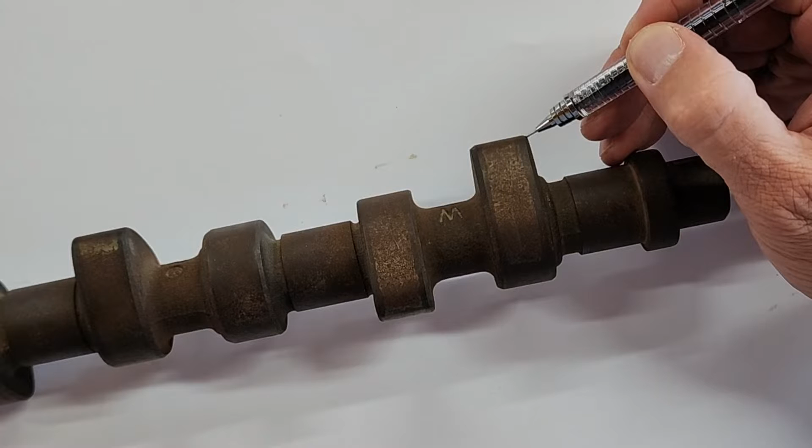'n afkanting. That's the thing that you have to remember. Then if you look carefully, you will see that there is a round edge there on the inside. When it is on the inside like that, it is called a fillet.

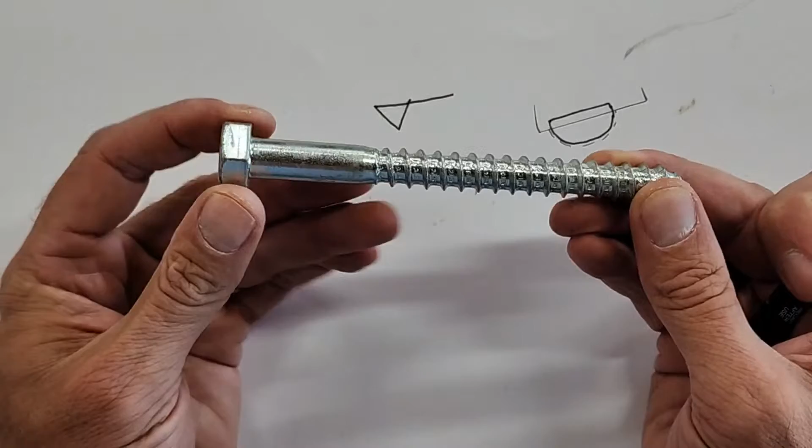Let's look at the next part here, which is our bolt. All right, and so this bolt has different components. We've got our external screw thread here that's clearly visible, and then you have on this end here, on the shaft, an angled end, okay, which is called a taper. So we've got a straight edge here, and then it tapers. So a change in the diameter at an angle is called a taper.

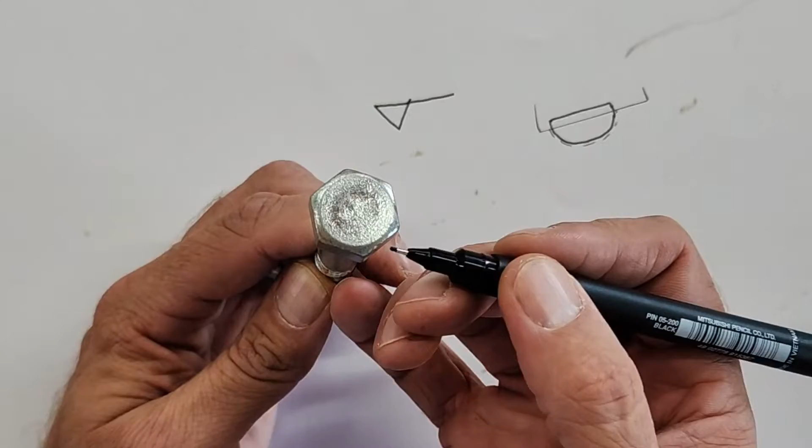Okay. Then on this bolt we've got our head here, and of course we've got the 6 sides of this bolt head. Okay, and there you can see again on top there is an angled surface of 30 degrees. Okay, all right, and then we have our screw thread here, in Afrikaans jou skroefdraad. Okay, let's look at another example.

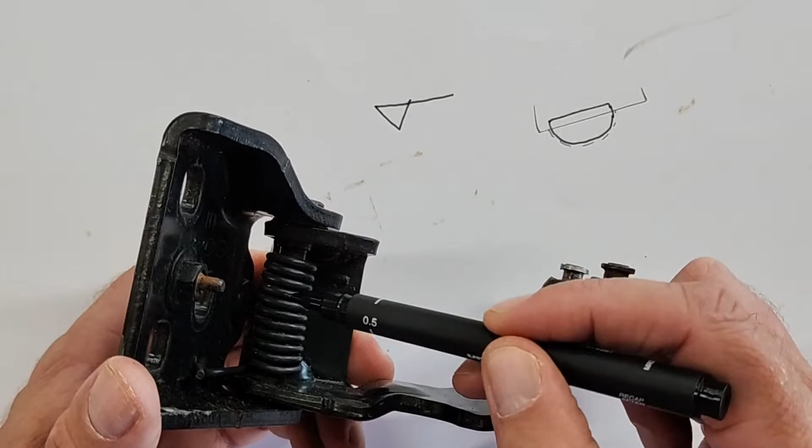Okay, this thing I actually picked up the other day, I cleaned it, and because there's quite a few components, it's nice to know this one. So let's start here from the inside. Okay, here we have a spring. I think you can see that quite clearly. This is called a cylindrical spring, cilindriese veer. And you can see there how it actually allows that to open up. Okay, important to know this, cylindrical spring, cilindriese veer.

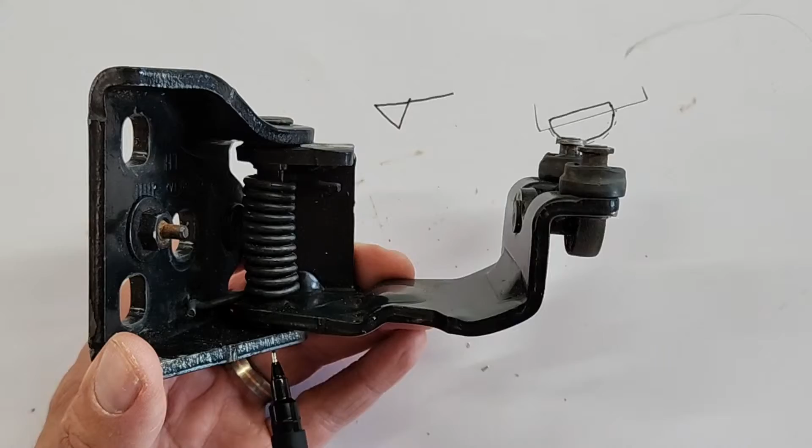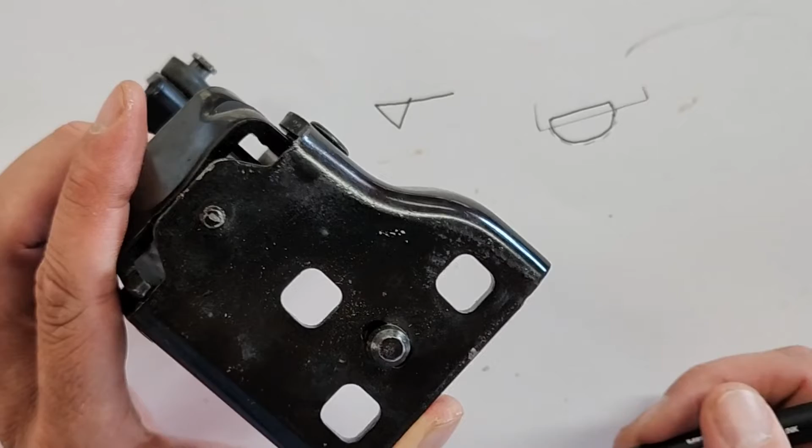All right. Between these two components that join the external one and the main body, there's another shaft there. Do you see, running all the way through? Okay. And it's got a klinknael op die einde, a rivet on the end to join it into place. Okay. Then this might sound simple to you, but you have to know this is a hole. Okay, dis 'n gat. Daar's 3 van hulle.

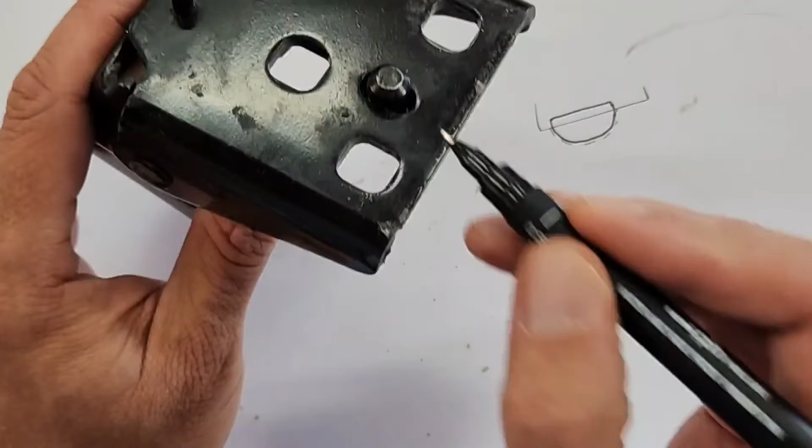All right. Then, let me just quickly double check here. This one here, that extends here, is called a dowel or a tap. Oh, sorry, it's this one here. That's a dowel or a tap. Afrikaans a tap, or a dowel. It's a piece of metal, and this will also, of course, help it to position in whatever it joins to.

Okay. Then on this end here, we've got a couple of things. We know this is a form of a wheel and a guide here, but what allows this to have very little friction when turning? What's on the inside here? Almal weet dit. A bearing, okay? Or a laer in Afrikaans. A bearing, it's called in English, or a laer in Afrikaans. Now you're going to have to know how that bearing is drawn, and I'm going to show that to you in a moment. Okay, well, let's see what else is there.

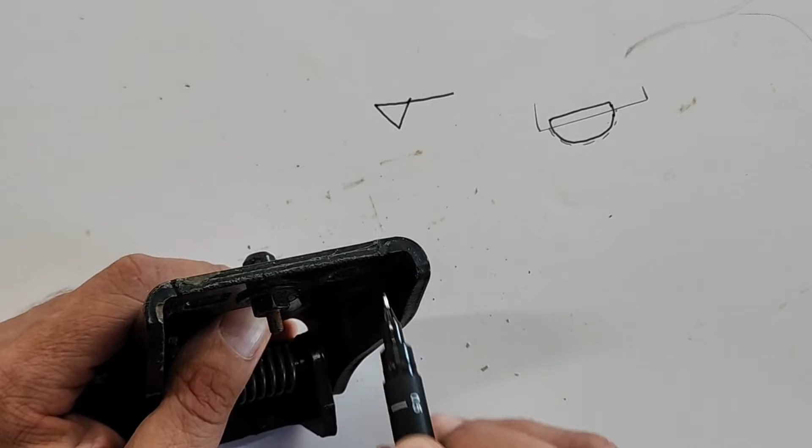Okay, so here maybe is a good, yeah, I think you can see that. So remind me quickly, an internal radius is called a fillet. What would an external radius like this be called when it's on the outside? It's called a round. In Afrikaans, a ronding. Okay, so the moment that radius is inside, it's a fillet. When it's on the outside, it's called a round.

Okay, all right. Then you see here, it's not that clear maybe, but there's a bit of a support here to strengthen this part. Okay, and that is called a rib. Rib in Afrikaans and English, rib. It's strengthening this component so that it can carry a load here. It's called a rib. This is maybe a very small example of it, but I think you're able to see that.

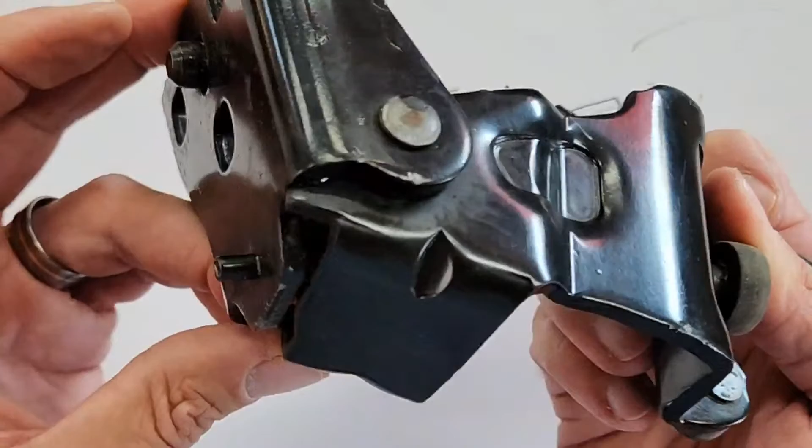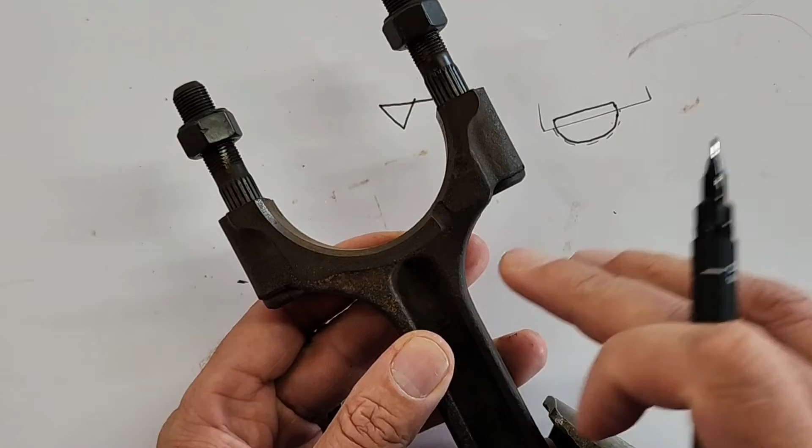Okay, all right, let's look at, I've got a piston here. So we're just running through a couple of components because all of them have got some elements that you need to take note of and that you need to be able to apply. All right, so here at the end of our piston, of course, this is called the piston arm, and you can see again there's parts that are quite rough that weren't machined, but then you have smoother surfaces that have been machined, and it will have that symbol when we actually draw it on the drawing board.

Okay, then we have here a pin, and on that end there is an external screw thread. That helps us to join this shaft or the arm onto, for instance, our crankshaft. So this nut here, I'm just going to take it off for us. That actually has an internal screw thread. Internal screw thread, there's the external screw thread. At the end of this external screw thread, we've got a 45-degree chamfer again.

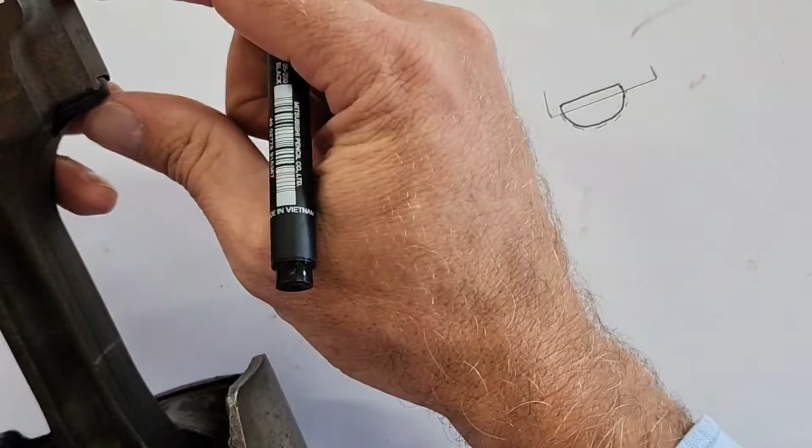All right. Then we have ribs here on this shaft. What would you think is the reason for this? If you just look at how this is joined here, this pin is compressed, or with a lot of pressure pressed through this hole. This is a very strong material. It has to withstand a lot of movement, and so this is actually increasing the fit, the tightness of the fit of this hole as it is pressed in there, to be sure that it's a tight fit. So that's the reason for that. It's increasing the strength of that fit.

All right, here's the top of our piston head, and there you can see also certain parts again machined or not machined. There we have a spring. What is this one? It's got the two holes there. There's actually a spring in there, and if you have the right tool, you will compress these two ends and you'll be able to take out that spring. Sorry, I forgot the name of that.

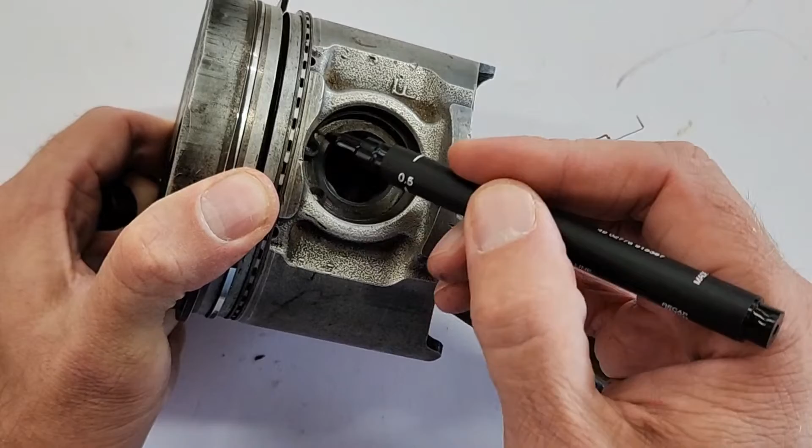There we have a shaft again on the inside. So this spring is keeping our piston head and the arm in place. You see that? It's basically just going to press in, and the moment you release that spring, it closes up this end, and it stays in place. All right, let's see what else I have. We've already spoken about our internal screw threads. That's fine.

Yeah, okay, that's it. Let's have a look at the actual pages on 2.1, because now we're going to put into practice that which we've just learned. They've given you an exploded view of the different components. Now, I'm not going to write each one of these. That's your responsibility, but I will talk you through the next few pages in this video. So if you really want to gain understanding, keep watching and keep paying attention if you're in class, of course.

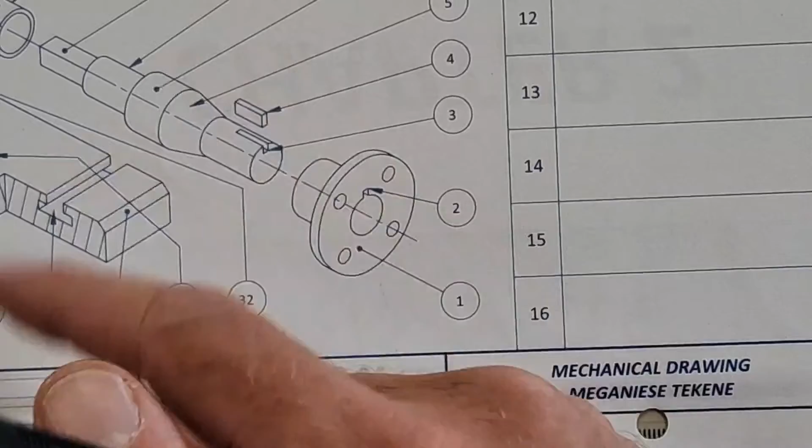All right, so let's zoom in here. Luckily they've given us a good order, so we're going to take our time, and you can identify that which you've just seen with some of these parts. Okay, so let's go up. If you are able to answer them without my help, you can shout it out. When it's got the dot at the end, it's referring to the entire component. When it's an arrow, it's pointing to a specific feature.

Okay, so number one here is called the flange. Flange, F-L-A-N-G-E, and in Afrikaans it is the flens. It's exactly what's going to go onto this end here. If you see there, look at how it's joined. There is a keyway, there's a keyway, and there's the key. Just like I explained to you, okay? So take note of it.

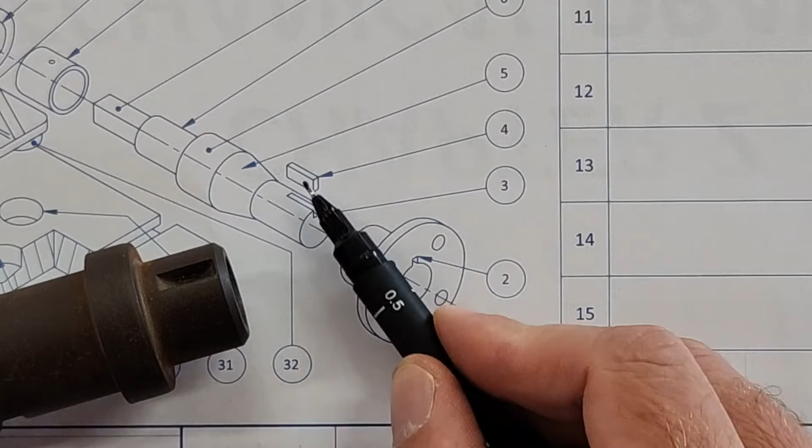Of course, the kind of key is different. The one here is a Woodruff key. This one is just a traditional key, but the way they join together is through a keyway. So that's the next one. Number two, keyway on this flange that fits over that one. Does that make sense to you?

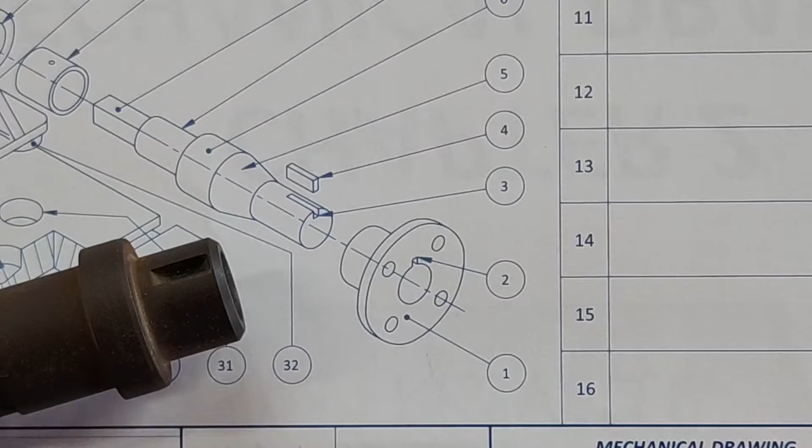Okay, so we've got keyways for 2 and 3, and then key for number 4. Yes? That's right. Alright, let's see how well you listen, because number 5 I also mentioned: if I have a shaft and there's an angled part going from a bigger diameter to a smaller one, it's called a taper. Well done, Mr. Heeman. In Afrikaans, tapsheid. You need to write it in now. There's no answer book for you. You need to follow this.

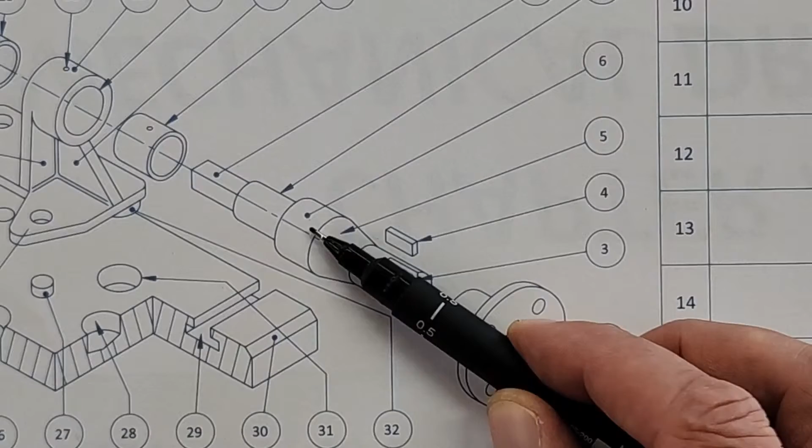Then number 6 here is just referring to this bigger part, which is a shaft. Then number 7, we also spoke about this. On that shaft, there's a shoulder. So it's called a shoulder on a shaft. In Afrikaans, skouer op 'n as. Okay.

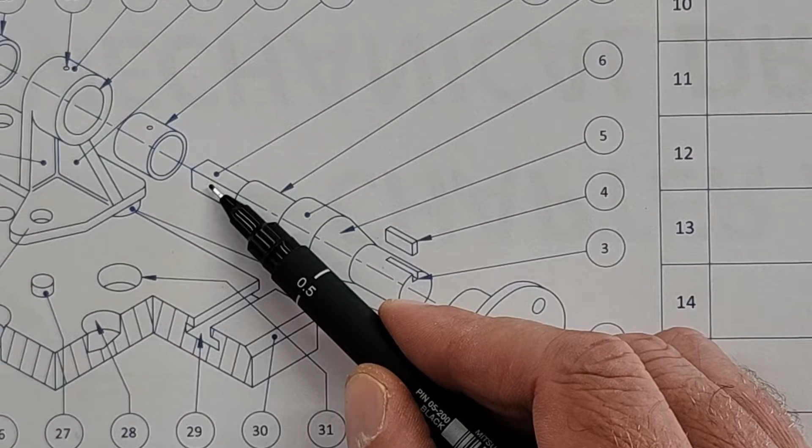This end here, I'm sure everybody should be able to guess in class. What does it look like? Square. Vierkant op as. Square on shaft. So we go from a circular shaft to a square shaft. What would be the reason for that, maybe? Again, to transfer torque, to transfer movement.

If I have a square there, whatever is fitted onto that, if you look here at this actual drawing, you can see that that square fits into that square. Do you see that? And so it will turn number 15, which is our rim. We'll look at that now. Then number 9 here, that is our bush, and that will fit over, in this case, over here at number 7, which is our shoulder. So that is a bush,

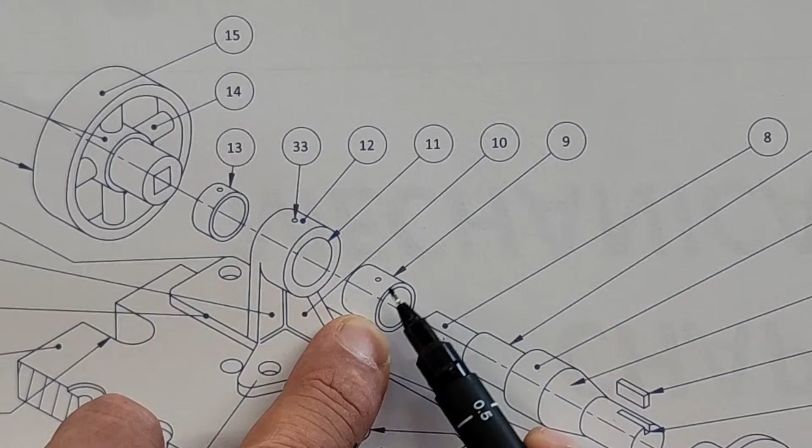Number 10 refers to this part of it, and that is a web. If I would ask you in class, what's the reason for a web?

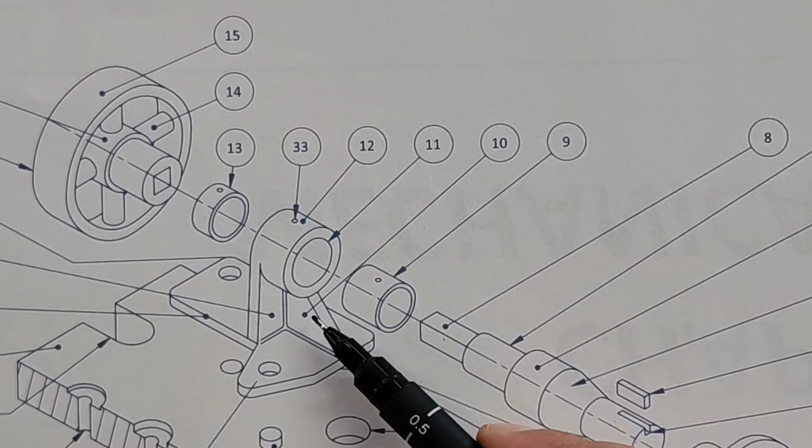It's supporting this structure to be able to withstand movement. No, it's giving support to this top part. Yes.

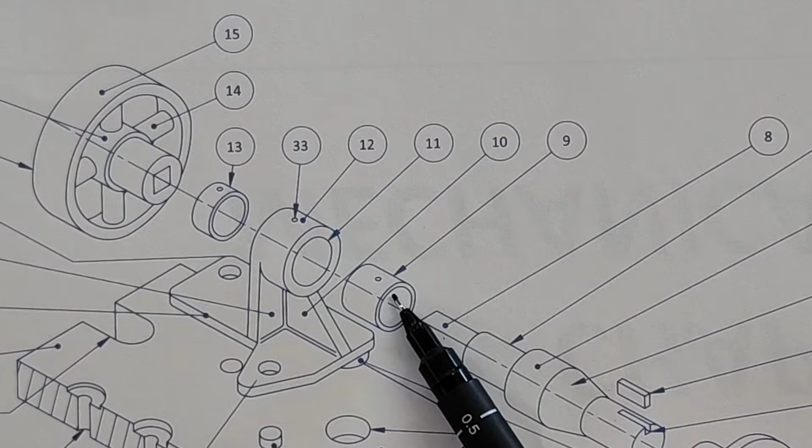Look here people, I honestly can't tell you why they came up with these names. All I know is you need to know these components. So it's time for you to make notes and remember it. Alright, number 13 here is a collar. In Afrikaans, 'n kraagbus. It will be the same diameter here as our bush. Kraagbus. Alright, and then you're going to number 14, which is part of this rim.

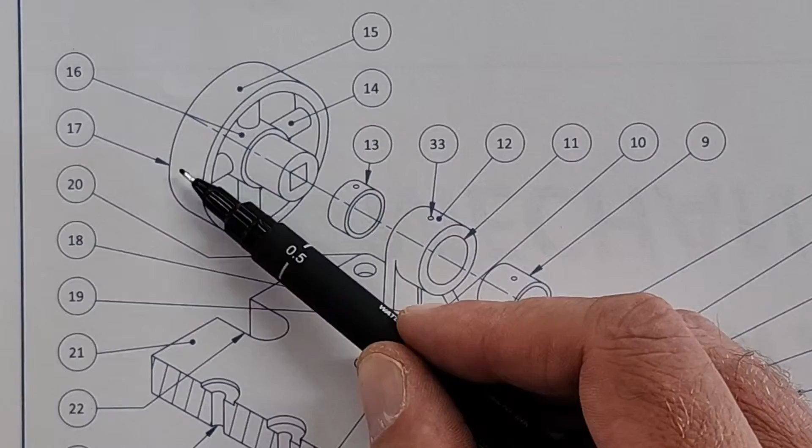In English, it's called the hub. This part here. Then number 17, this component in total is called something that's very common to you, a pulley. Or in Afrikaans, 'n katrol. Katrol, pulley. Okay, then we continue. Let's jump to number 18. You know what that is already. It is a rib or a web.

Well done. Number 19, this base here, that is called the bracket base. In Afrikaans, die steunstuk. If you see here, number 25, which is our lug, fits over 27, which is the dowel or the tap. And so each component here will fit and have it placed exactly where it needs to be. But it's called our bracket. In Afrikaans, die steunstuk. Alright, number 20, there we go.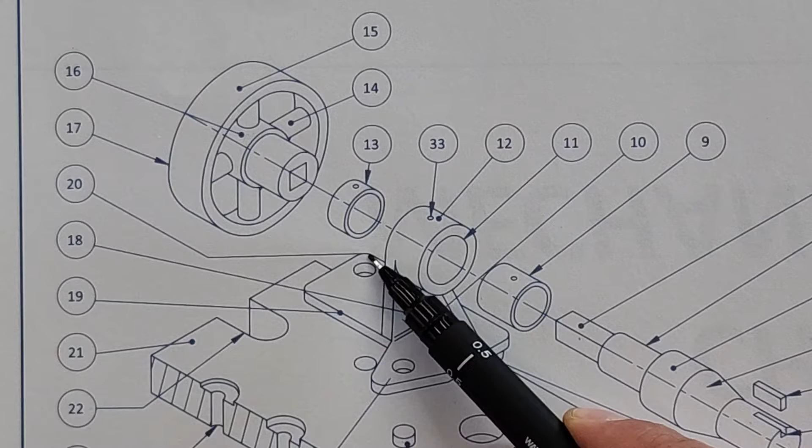So that is our round. Let me see here. They say it's a fillet. Can that be? Where's the internal one?

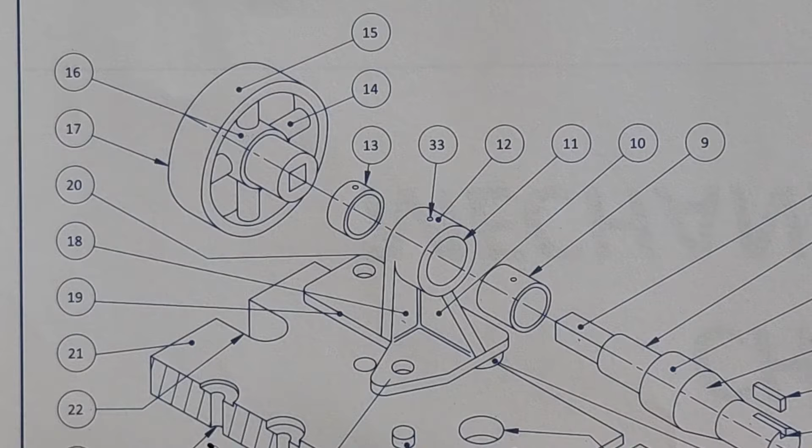Number 20, the fillet. Okay, I'll just double check that one. Number 19 here, sorry, I'm over 21. This is there, it's a table on which this fits. In Afrikaans, die blad. Number 22 is 'n slot of 'n groef. Number 20 is 'n ronding of 'n fillet. Okay. Then number 22 we've said is a slot or in Afrikaans 'n groef. Slot, S-L-O-T. Alright, number 23.

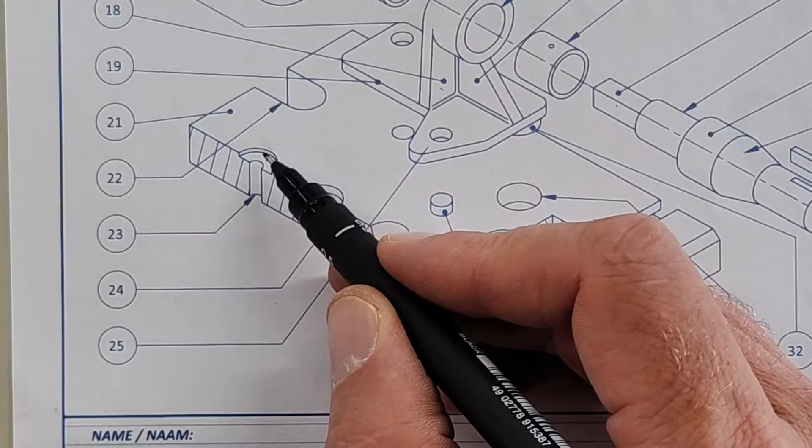Alright, this hole, if it has a flatter part that's wider than the hole itself, it's called a spot face hole. Spot face hole. In Afrikaans, koolvlak gat. Koolvlak gat. In English, spot faced hole. When it's got that flat part, then it's spot faced, koolvlak. Number 24, that is a counterbore, parallel versinkte gat.

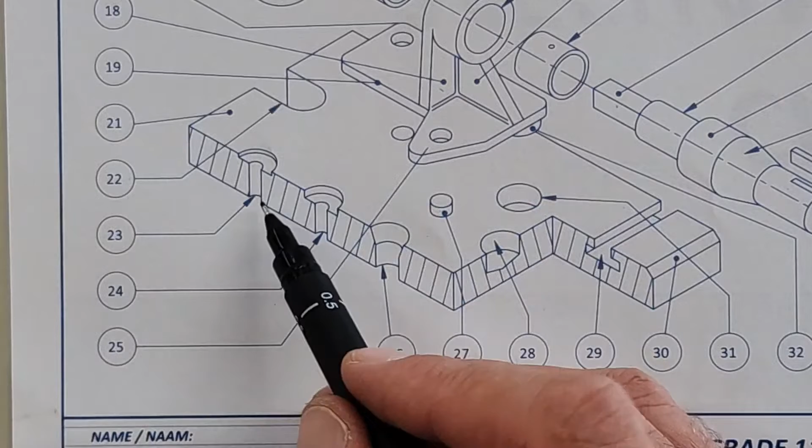Okay, so I think it's difficult to see the difference between these two, counterbore and a parallel versinkte gat. The one is deeper than the other one. But when they just give you one, it will be difficult to identify. So just for yourselves, if it's very shallow, you refer to it as a spot-faced hole. If it's a bit deeper, refer to it as a counterbore hole. In Afrikaans, parallel versinkte gat. Eerste een was 'n koolvlak gat. Okay, just double check those two.

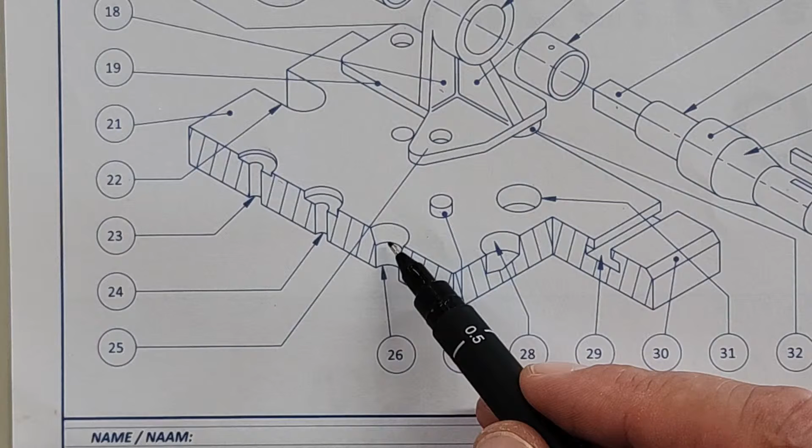They're very much similar. Alright, when it's at an angle here, that's easier. That's a countersunk hole. Countersunk. Afrikaans is dit 'n versinkte gat. Versinkte gat. Okay. Nummer 27 het ek gewys vir julle. Dit is 'n tap. In English that's called a dowel. Tap or a dowel. Alright.

Then this hole here at number 28. So what is interesting about this hole, it does not go all the way through. So it's blind. Looking through that, you can't see all the way through. So it is blind. Blinde gat. Blind hole. Easy to remember that one. It doesn't go all the way through, so you can't see through it. It's a blind hole. Blinde gat, yes.

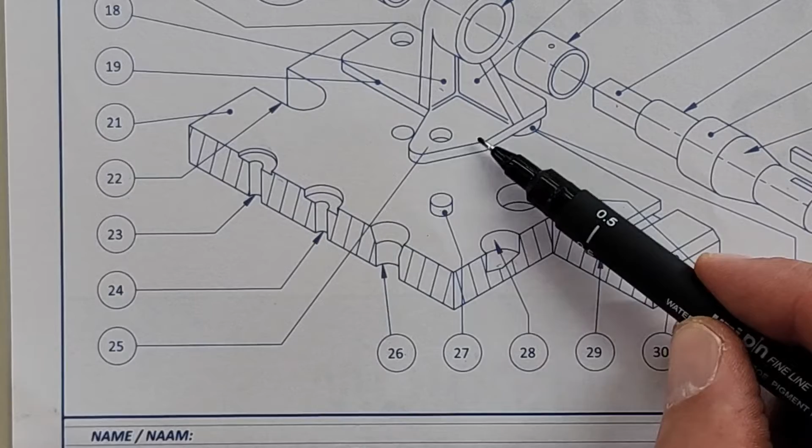Number 26, countersunk. Well done. Yeah, 26 is the countersunk. Number 27 is the dowel. Number 28 is the blind hole. Afrikaans, 26 is die versinkte gat. 27 is die tap. En 28 is die blinde gat. Okay, 25. I missed it. Oh, okay. That is a lug, hingsel. It's this part here that comes out here. Lug, hingsel. Don't ask me why.

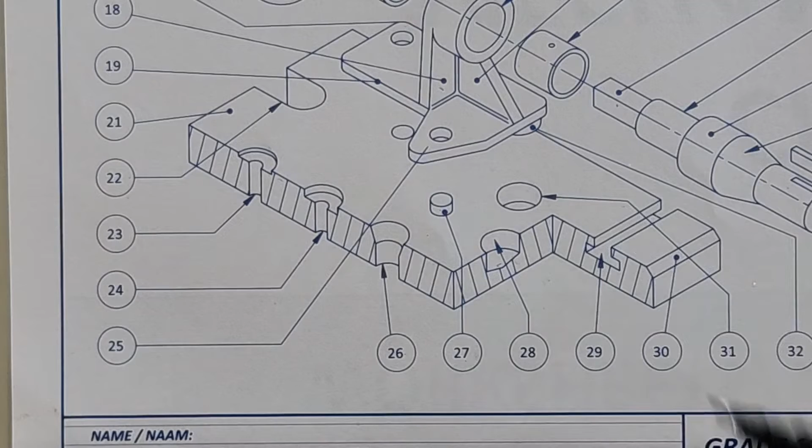Alright, let's check here number 29. Alright, so this is an easy one. You can see there it's got that shape of a T. So it's a T-groove. T-groove. Number 30, that's that 45-degree chamfer, afkanting, 45 grade afkanting wat jy al gesien het. Nommer 31 is tapversinking, recess.

Look, honestly, it's so difficult to see the difference between many of these things. So when they ask this in the exam, it will be much clearer, né? When you get this as a test. But just for now, make sure you know the correct name. It's called a recess, tapversinking. Very much similar to this part here, né? But there's no hole going through. So it's just this part here that they want to fit in there. So it's also very close to a blind hole.

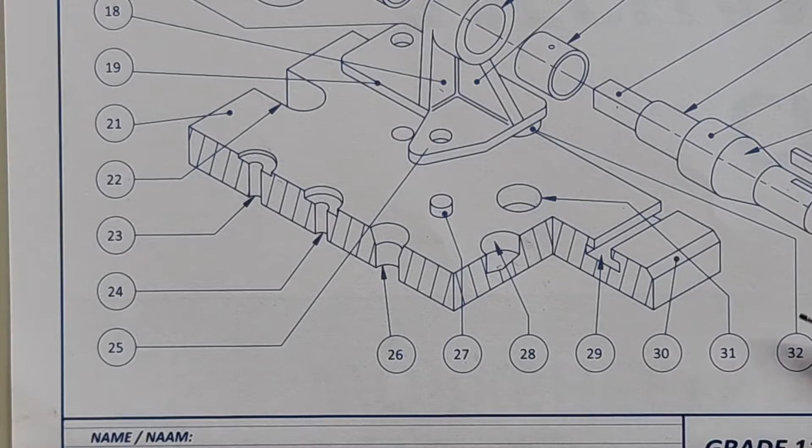Alright, then at 32, that is the spigot. Spigot, it fits into this recess. In Afrikaans is dit 'n tapspen wat in hierdie tapsversinking ingaan. Tapspen en tapsversinking, so die twee gaan saam. Ek dink hulle sal dit so vir jou wys ook in die eksamen. So make sure you write it down. This is called the spigot and that is the recess. In Afrikaans is dit die tapsversinking en daai is die tapspen.

And then the last thing for you to take note of is 33. It's right here on top and that is your oil hole. Oliegat. Oil hole, oliegat. Okay. Alright, let's see if we can do 2.2 as well.

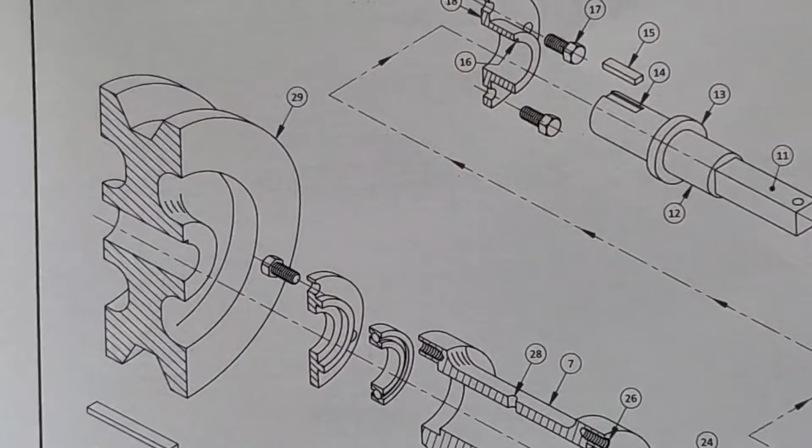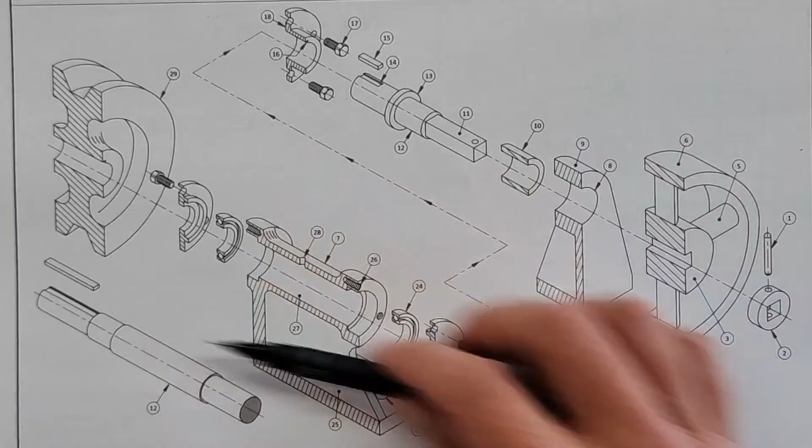Okay, we're going to start, maybe I can zoom it out a bit so you just see the bigger picture here. Okay, so there is a beautiful drawing given by the guys from HSE. Exploded view of a mechanical assembly. Plus, in this case, they've also sectioned it so that we can see the inner workings of it. And there's a few more components that we're quickly going to look at, but some of them you already are familiar with. Let's zoom in so that you can follow with me closely. We're just going to go again from 1.

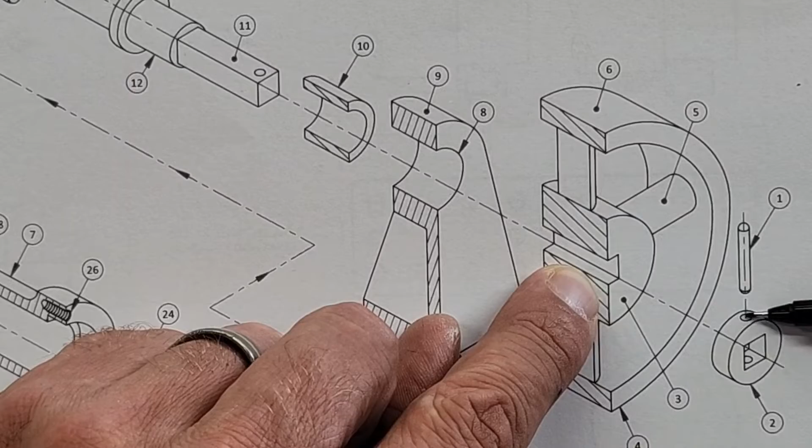So, number 1 is the pin. Pen. Afrikaans pen, English, it's called a pin. Right. Number 2 is a ring. Now you can see here, if you look at this drawing, that this shaft has got a square on the shaft. It goes through the bush and all the way through our flywheel, it goes through this square. Do you see what happens? This pin falls through this hole, through that hole there. Alright? And it's going to fasten our shaft onto this hole. Does that make sense for you?

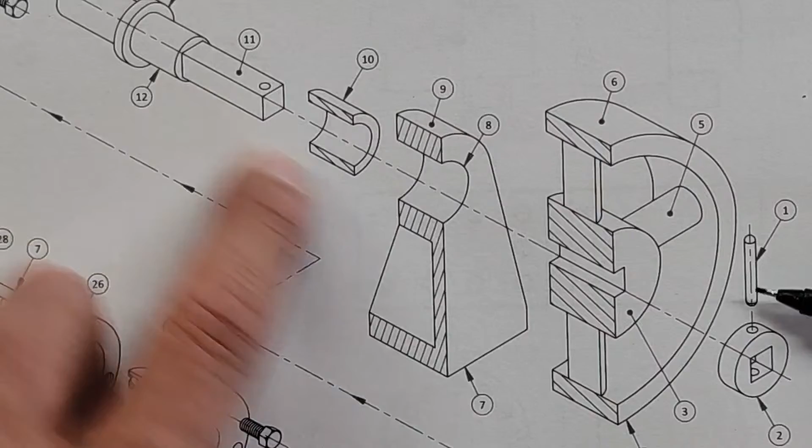So everything that you're going to see in mechanical assembly is going to have these kind of features and, of course, reasons for being there. Okay, so the pin ties in this shaft through this ring onto the flywheel. All right. Number 3 here is our hub.

Ring. Okay, number 3 is your naaf, and we've done it just in the previous drawing, so you should be starting to get this. Hub. Okay. What's number 5? Help me out. Oh, number 4. Let's do number 4. 4 is there. It's the wheel. It could also be the rim, nee?

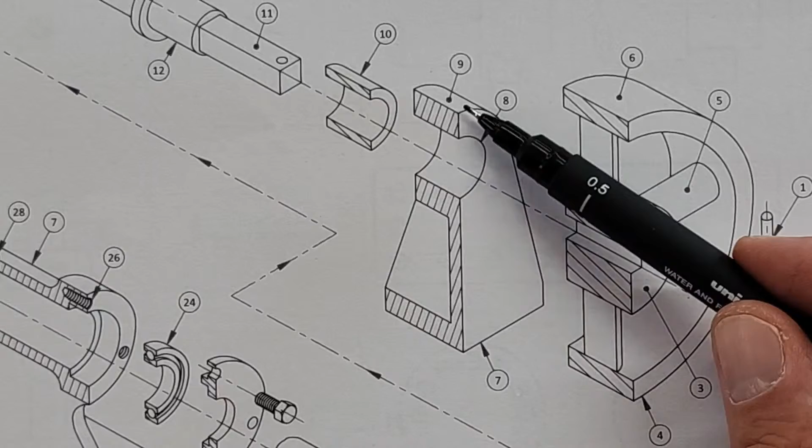Nommer 9 verwys na die hele saak wat die naafbuskop is. In English, this entire part is called the boss. Boss. Like you go boss, man. I'm the boss. Ja.

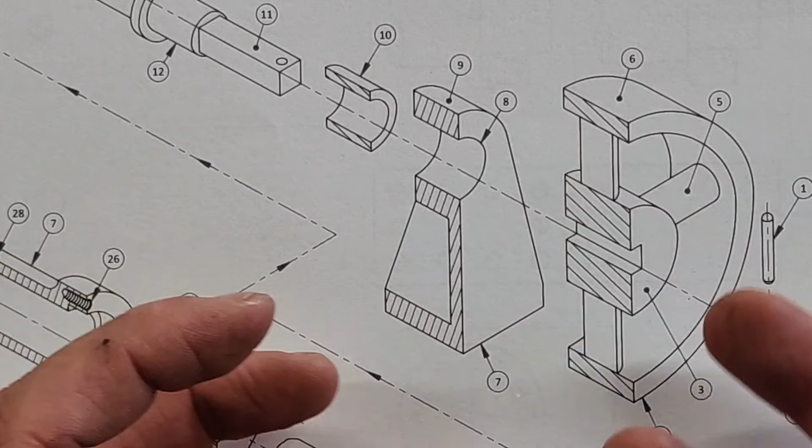Okay? The body. Alright, let's look at number 10. Number 10 is your bush. It's not a complete bush that they've shown you here. Then we've got number 11. You know that? What is it? Square on a shaft. Vierkant op 'n as. Number 12 is going to be this shaft in total. And number 13. Yes. On the shaft we have a what? Shoulder, skouer op 'n as, shoulder on a shaft.

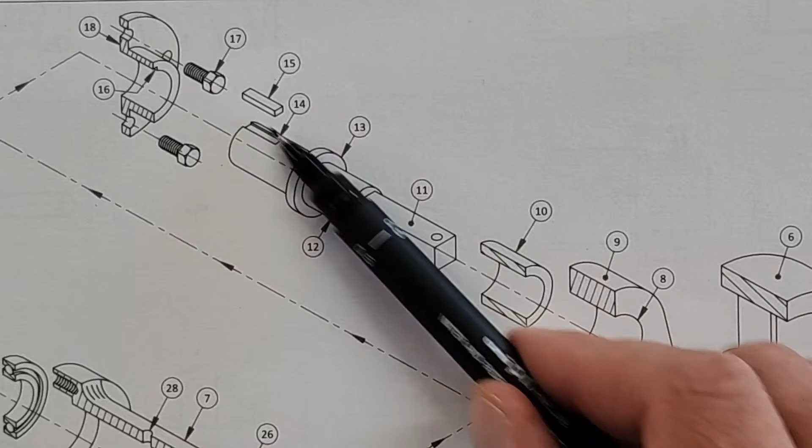Alright, number 14, you know that, what is it? Keyway, spygleuf, mooi. Then 15 is the key, well done, spy. Then at 16 there, it's very small, but that's the keyway on our flange, of ons flens het daar 'n klein spygleuf. Number 17 is a bolt, en dan 18 is die flens, or the flange.

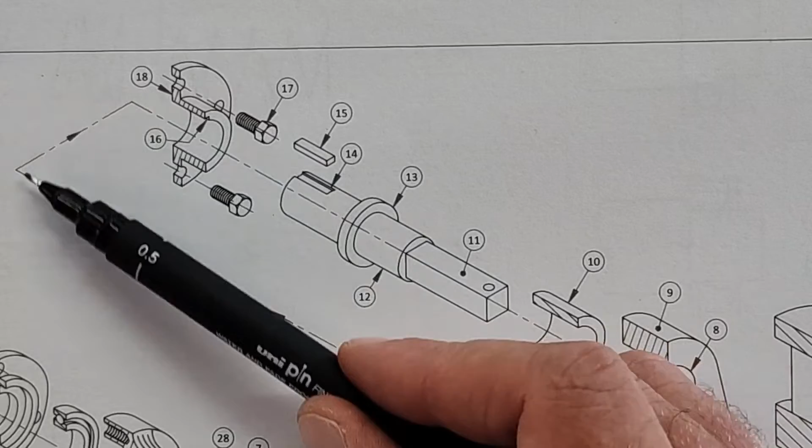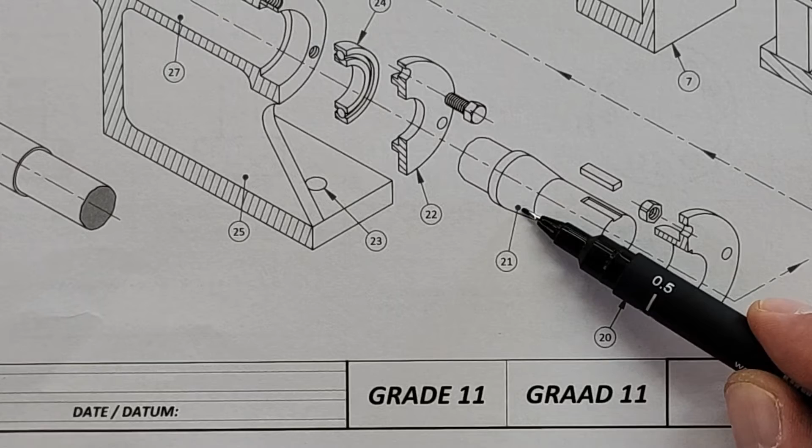Okay, keeping up. All of this is put together, so we go back all the way to the bottom. Now with number 19, we again have a flange, so we've got 2 flanges that are going to be bolted together with that bolt we just looked at, and the nut. So that nut puts the 2 flanges together via a bolt. Again, they didn't ask it, but there you can see how the key and the keyway fit together. What is number 21? Taper, good.

Then we go to 22, which is a cover plate. It covers our bearing. Why would you have a cover plate that covers a bearing? Yes, dust, to keep it clean. Number 23 is a hole. Ek het jou gesê jy moet kan weet dis 'n gat. Number 24, we've got our bearing, ons laer. 25, you know, it's a rib.

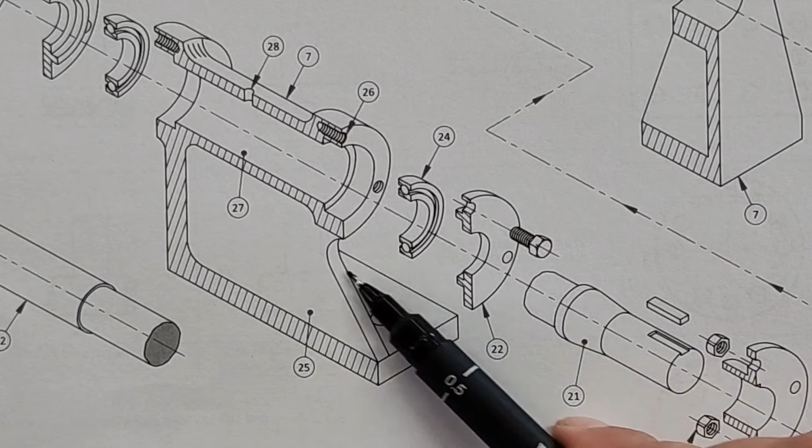What's interesting, look at this. Do I section a rib? Gaan ek 'n rib arseer as ek hom sny? No, not when I cut through the length of it. That's why you see here very clearly it's not sectioned. It would have been very confusing if we had section lines all the way through. So a rib is never sectioned. Number 26 I missed.

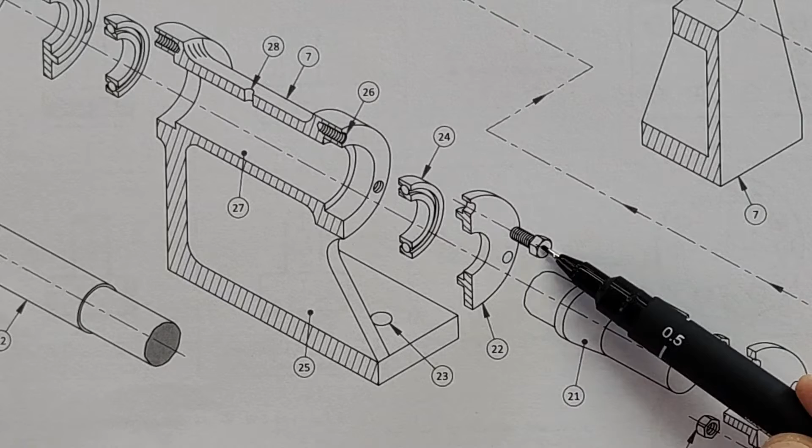Tapped hole, getapte gat. So that is a screw thread on the inside there. They will use this bolt to tie the cover plate on. Number 26 is a tapped hole. Afrikaans getapte gat. Okay, then 27 here is an oil cavity. Alright, that's the oil.

There's the oil hole, oliegat. I think they're numbering there, oil hole, oliegat. They say 27 is an oil cavity. So if I put oil into that, it will, of course, fill this cavity here. Okay, oliehouer. Oliehouer or oliegat. And that oil will ensure that there's not friction on the shaft when it moves.

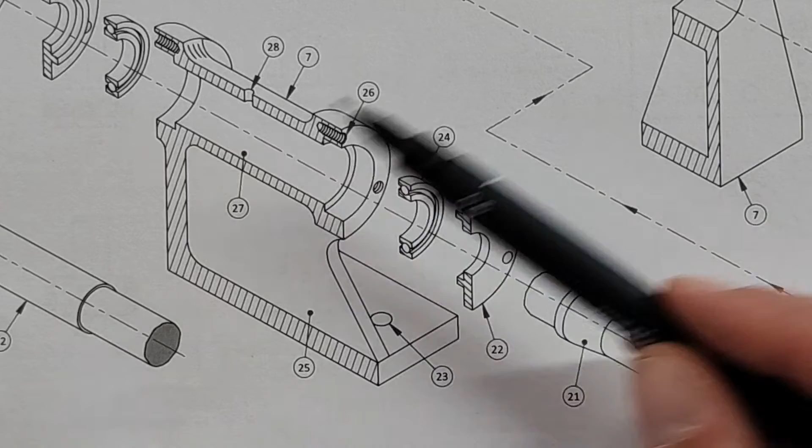Okay. Alright, then the last two: 29 is a V-belt pulley, a V-band katrol. V-belt pulley, I think a lot of you have seen that before. There's one more on here, that was number 12 that I missed, and that's just the shaft, the as here.

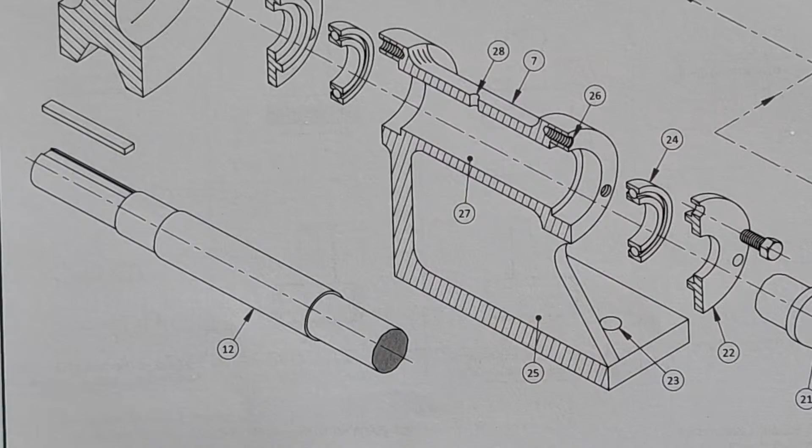So, alright, there's one more page. If you are wanting to stay with me, we're going to do one more page, and that is page 2.3, and then we will be done with the preparations for our actual mechanical analysis. So let me just organize myself here for a moment.

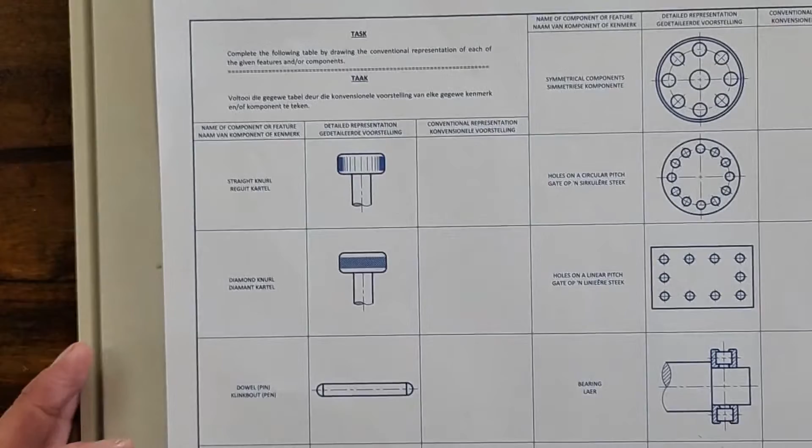Okay, so these are again different components. This is most likely how they will ask it for you come the exam. Alright, they'll actually show for you the detailed representation, and you have to draw, then give it a label. Okay, now I'm going to have to help you with this one because they want us to draw freehand the different components. So we're going to see how far we get here.

Alright, so there's a detailed way of representing a straight knurl, and there is a conventional representation. A straight knurl is at the end of a shaft that I want to be able to make adjustments. Why would they put knurling on there? Why? For grip. Your water bottle has knurling on it, straight knurling on it, when you open that up.

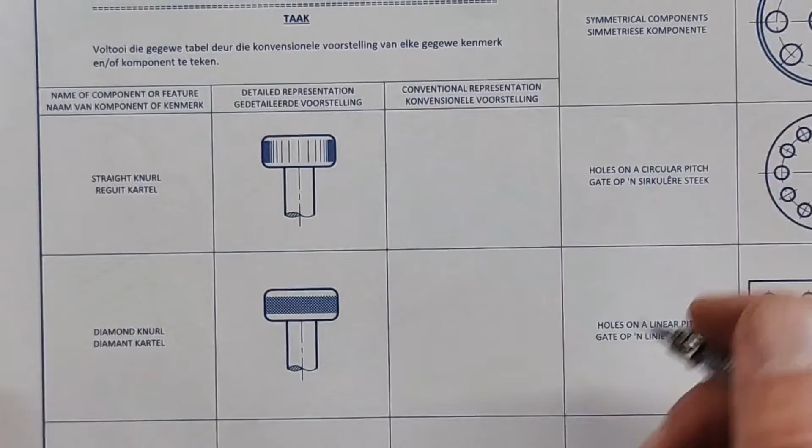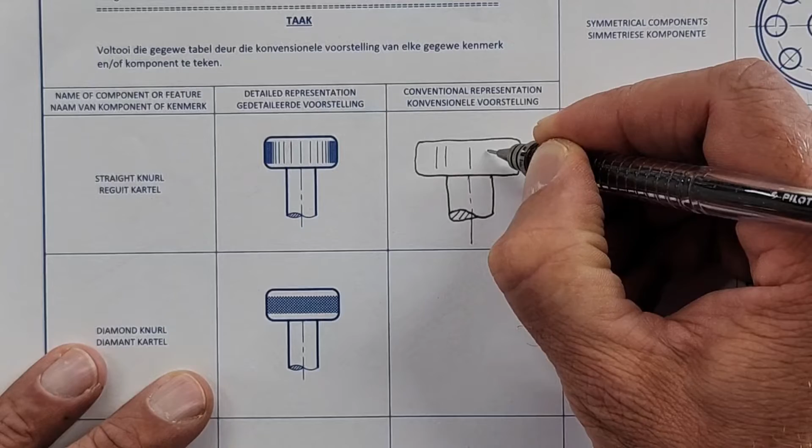Okay, so the way that you will draw it, you can stay with me here, try and keep it neat, okay? Yeah, so just as we draw, I'm going to teach you some things. This is called an S-break here on the end. You have to have your center line also here, alright? And then that knurling is just lines, not equally spaced, on the outside a bit closer on the inside, so that it kind of gives you that idea. Okay, that is straight knurling. We're going to go quick because we don't have much time.

Diamond knurling, it's similar. Your radio at home has got diamond knurling on its knobs, but they use it, of course, in mechanical also. So we've got our S-break here on the end that needs to be hatched. This is all center line, and then we're just going to do freehand diamonds. Okay, that's the conventional representation. This is how we will most of the time draw it.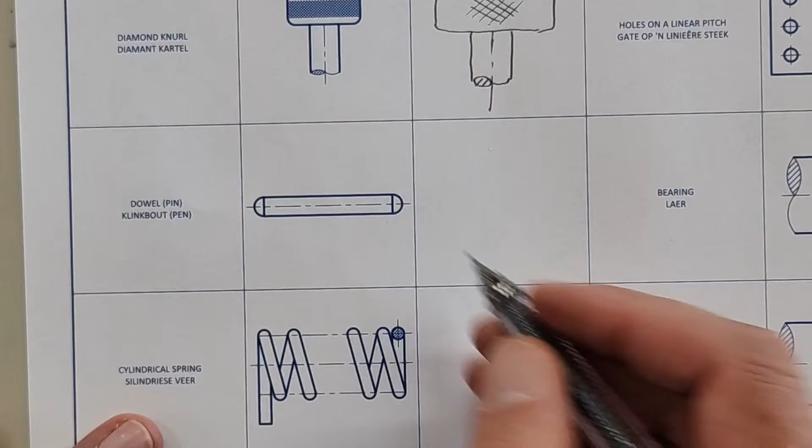Then a dowel or a pin, they just want us to be able to draw the end of that. So put a plus in there, color the different parts, and then the last thing here is we need to have our center lines. Okay, that's the end of a pin. So we're going to go quick.

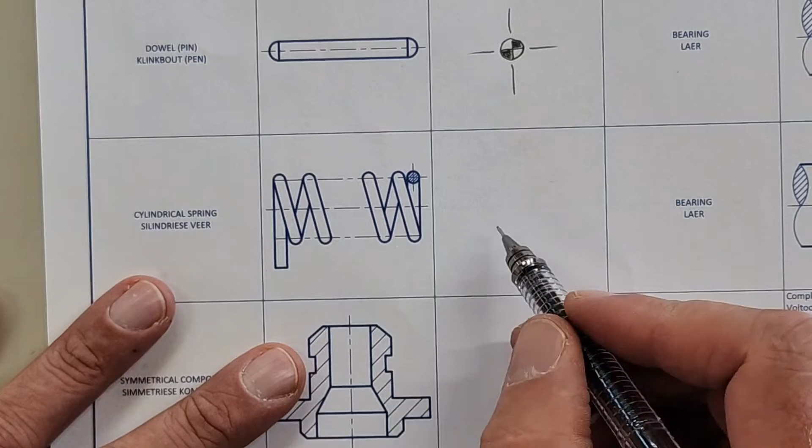Remember we did a cylindrical spring, and this is how we draw it. So we're always going to have the center line, and then we have the start straight line, and then we're going to go zip, zip, zip, and you can do as many as you want here, but you have to end with a line that is straight. Okay, makes sense? Can have a few more springs in there if you want to. They didn't specify the amount. Maybe try and get it a bit more even than that, but that is the conventional interpretation of a cylindrical spring.

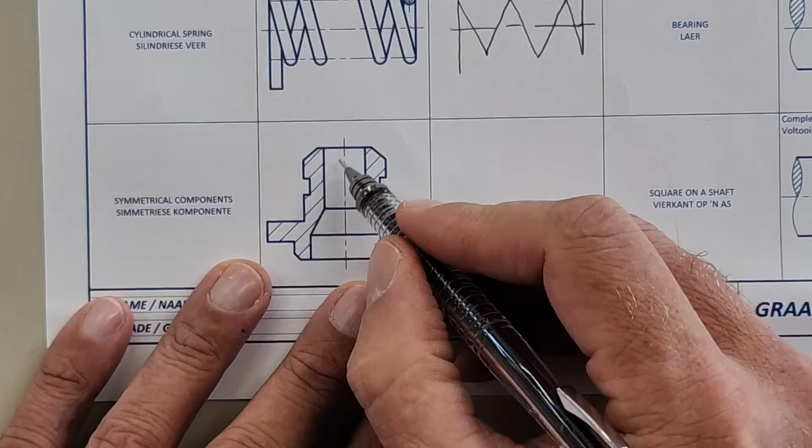Alright, then they want us to show a symmetrical component. Now, what is a symmetrical component? It's when the one side of the center line is exactly the same as the other side. So what you're going to draw is, you're going to draw this half. Okay, I'm not going to try and draw it all in detail because I'm wanting to finish this drawing, but you're going to draw this half exactly like it was given.

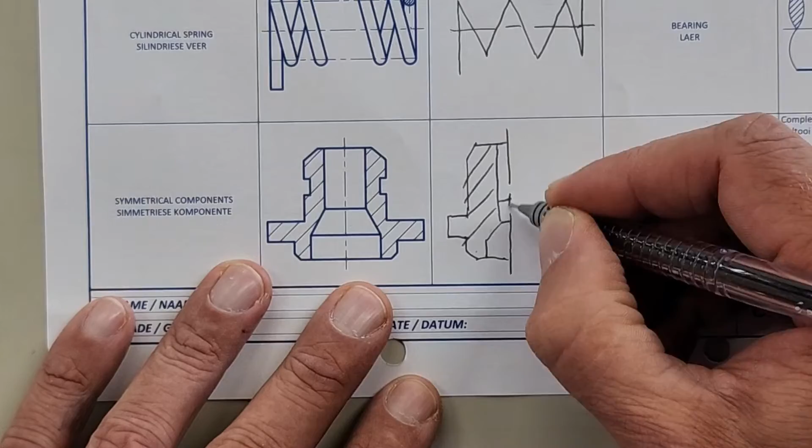And you are going to add your center line. Okay, just going to try and do this quickly. Ooh, glory. Okay, don't be mad at me. All right, this part is hatched, of course. I know it doesn't look 100%, but the part that shows the symmetrical is 2 lines on the top here. It goes like this and this. That is the symmetry part.

They want us to indicate symmetry. So at the end of that center line, make sure you have 2 lines. 2 lines. Are you with me? That's the important part. All right. Let's go on to the next line. This is the symmetrical component. Now there's, of course, a lot here. Again, if it's a circular symmetrical component, all you have to do is you draw a quarter of this.

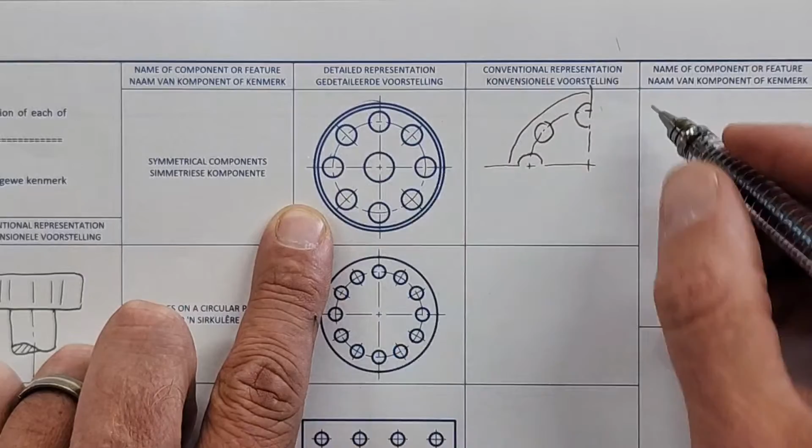So, got one circle here. You should draw it much more accurately than I'm doing, but what I'm doing is I'm just drawing this top off. I'm copying that top off, and what am I going to do here? I'm going to add the 2 lines again, same here. Sorry, that's out of the drawing. Okay? Are you with me? So I don't have to draw the full part.

Here is holes on a circular pitch. This one is important. I asked this 100 times. So when I have holes on a circular pitch, I can draw my circle freehand. Okay? And then, always when you have a circle, what do you need? You always need a center line. Okay? And then I do 1 hole. And all I do for the rest of them is the center.

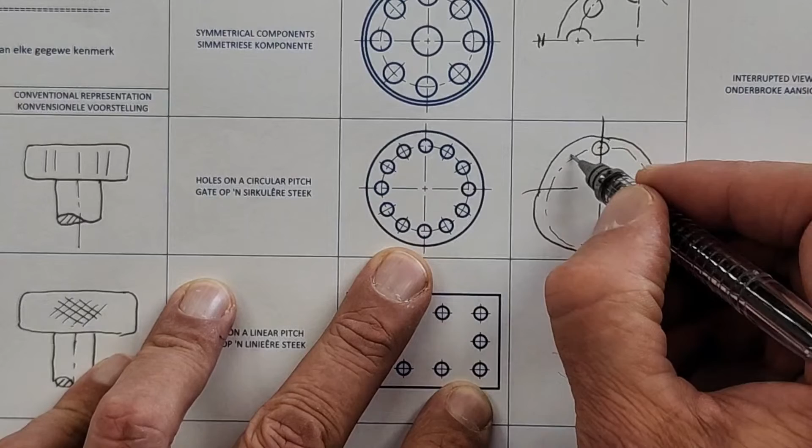Please take more time when drawing this. Okay? And all I'm doing is I'm adding the center lines here, where there would be a circle. Okay? So when there's holes on a circular pitch, I can draw it that way. Does that make sense to you? Okay. Can I quickly add something? The abbreviation for this, because I ask it in English, it's a PCD.

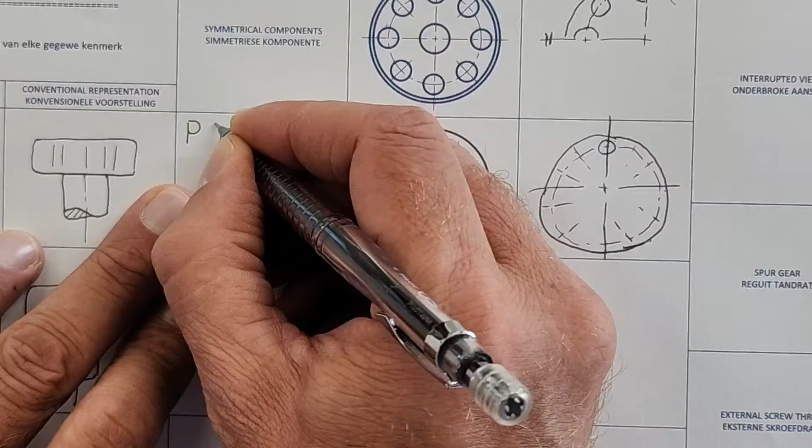Okay? Right there. It stands for pitch, circle, diameter.

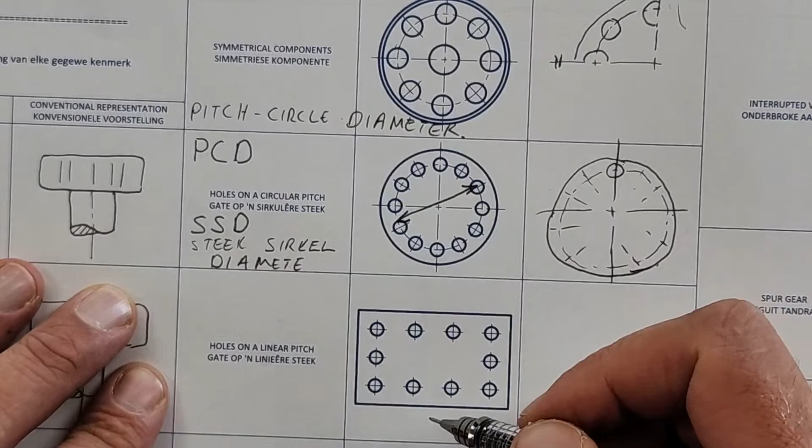Okay, what is that? That PCD, the SSD, is this diameter of the center of those circles. Pitch, circle, diameter. So they can tell you the PCD is 100 millimeters, and you know it's that diameter. They are going to ask this of you, I can guarantee you that. PCD, what is the abbreviation?

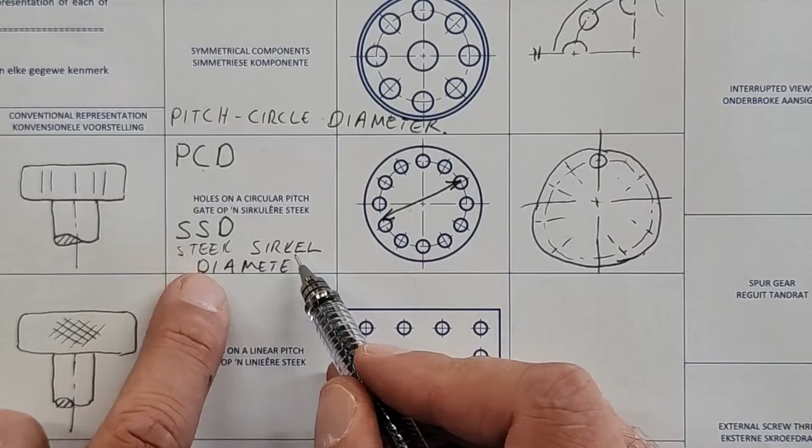Yes or no? Happy? Alright. Holes on a linear. So you're going to do exactly the same as this one. You're going to have your rectangle. You're going to draw one of them, pick one, with its center. And for the rest of them, you're again just doing all the centers. Okay? Then let's get to the bearing, because this is the detailed representation.

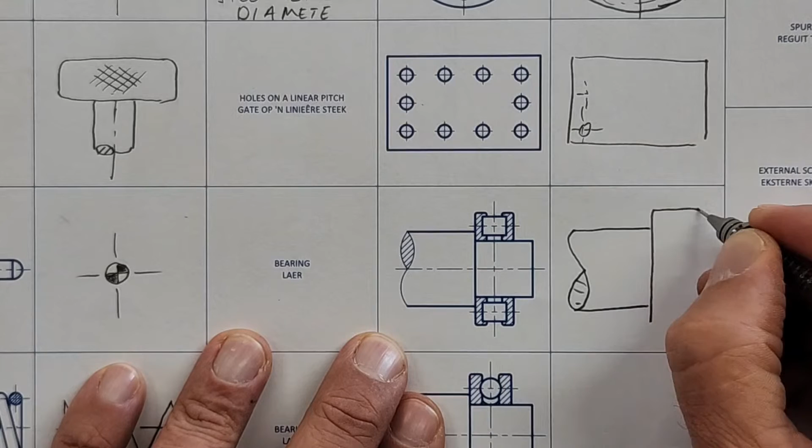We have to do the conventional. So I'll do this one quickly. There's the shaft. Got our S-break in here. Sorry, I flipped mine now. Doesn't matter. And then at the end here, what do I have? I've got my bearing, and this is the way that you are going to indicate it. This part here with an X in. Okay. And a center line running all the way through. The same for the next one.

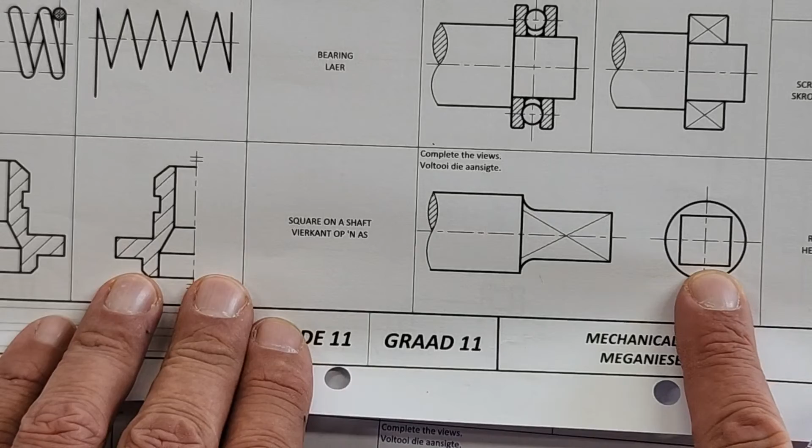Let me quickly show you the answers. There's the square on the shaft. And then the last part here, the different interrupted views, I actually showed you the S-breaks. If it's a pipe, there's a hollow dot there. Do you see that? Let me zoom in a little bit. It's hollow. And then, if it's just a break, you can do it like that. Then a spur gear, there's the conventional way of drawing it, the front view and the right side view.

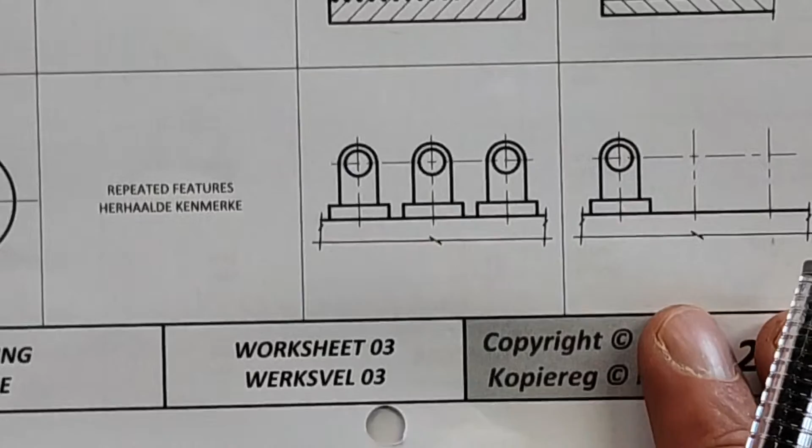External screw threads, we'll take time to look at that. That's how we would draw it. You've done this in grade 10. Internal screw thread, so practice that. Screw thread assembly when we've got both of them together. And the last thing is repeated features. This is an important one. They asked it last year in grade 12. So please make sure, repeated features. I'm not going to draw every feature. I just show the center lines again. All right.